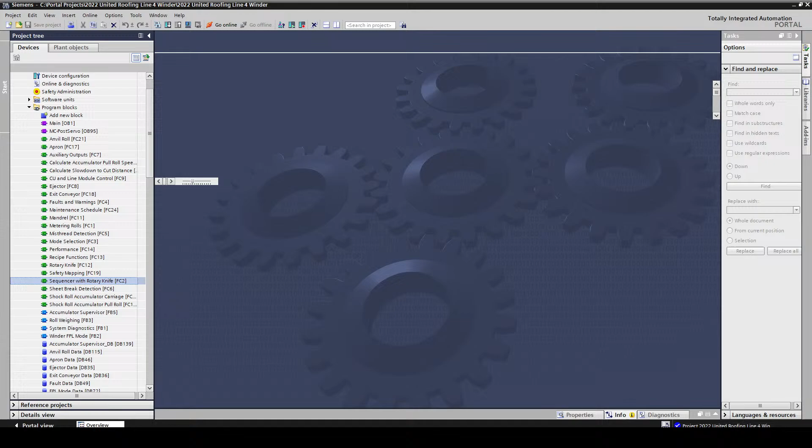So the first thing that you need to do is to have something that determines what block is getting executed, what set points are getting loaded, what functions are being engaged at any given point. And for this program, we chose to use a sequencer because for the most part, there's really two ways that you could do this. You could use a sequencer or you could use a state machine. And for this, the sequencer works a little bit better overall.

You are generally going to have to go through every step every time. And so the thing about it is if you get out of a step, something happens in the middle of an automatic wind, then you're not really gonna be able to recover, or at least there's only a couple of places where you'd be able to recover. And now I will brag on Brandon a little bit on this. Those recovery modes are the ones that he worked on especially to implement, to be able to detect these problems and to be able to recover and automatically start back up.

One of the things about this winder compared to an older style electric winder is that there's a person stacking just sitting there most of the time. He's on his cell phone, waiting for the rolls to hit him in the back as they're stacking up, and then for him to put them onto the pallet. One person, whereas the other one has three or four guys crawling all over the machine, adjusting everything, and for the most part, the few problems that are on the new winder, the alpha winder, it generally is able to recover from, take care of itself, and then just get back to running.

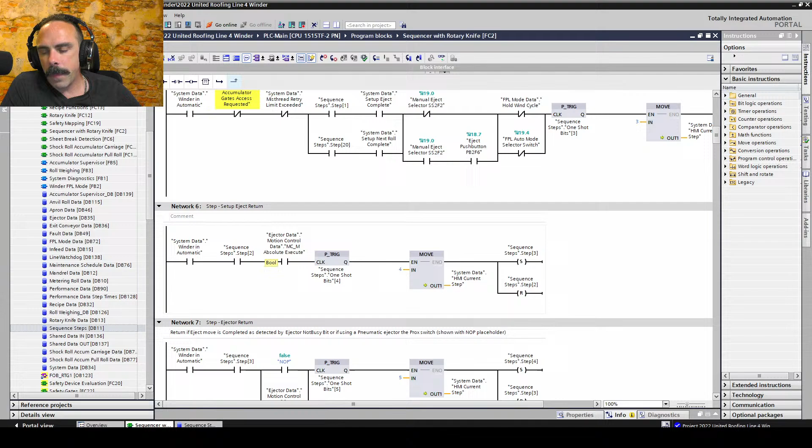But part of the sequence is, and the way that the sequencer works for this project is you have a series of steps, and you have a data block that has your sequence steps here. So this step is just an array of booleans, and as the sequence steps through, it goes through the steps, pretty simple. And in the logic, you have the conditions that are needed to advance to the next step.

This is a little bit different than a state machine, like I kind of mentioned. This wants to go from step one to step two to step three to step four, whereas a state machine can have transfers to any valid state. And we have some automatic controls, like our pellet mill control, that use a state machine. In its automatic control, it's sitting in a constant state for the most part. And then if something changes, it will transition into some other control state. And that's the difference between a state machine and a sequencer.

Now, with this sequencer, the only way that you can understand anything about how to step through these steps is to know the process. And that's where my dad's 30 years of experience of working with these types of systems has really come through, and set us up for success in starting from this.

Now, using the technology objects, this brought up a couple of issues, because, like we mentioned before, we always want to be efficient, and I think Elon Musk has said on multiple occasions that it's always a good thing to try and delete a feature, delete something. If you can delete it, then get rid of it because it's extra. It's just going to cause you trouble further down the line, and that's kind of a SpaceX principle.

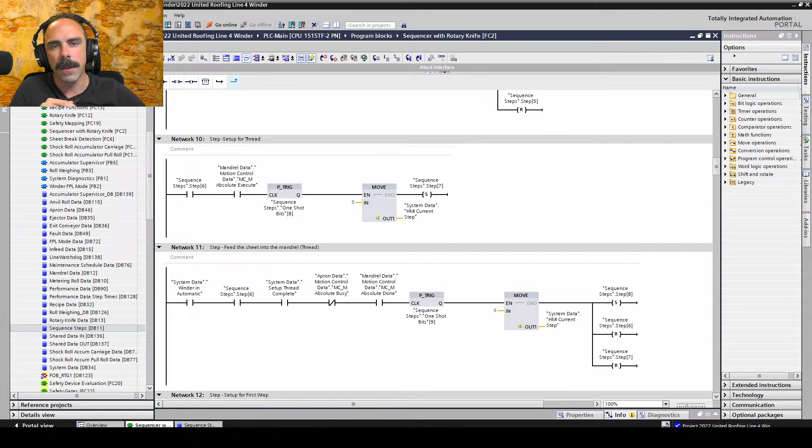And so you always get these code bases that work, but then you go back and look at it and you're like, oh my goodness, okay, so how can we pare this back a little bit? This is getting a little hard to work with. And so I feel like as we go through this, that's probably the next step: to be able to take in that methodology, and the improvement on this will be in simplifying the code and

kind of streamlining it. Were you able to get one of those, Brandon? Yeah, I downloaded a few. I guess I can try to stream on Discord or something. Yeah, if you stream on Discord, I can pull you up over on this other screen. Let's see if I can get them all up, because I know I can stream media player, but I don't know if I can have them all up in a queue. Obviously, this is our first time figuring out the best way to do all this. So while he's doing that,

I'll kind of just talk about the different axes. So there are quite a few different axes of technology objects in this. I'll show you in our technology objects. You can see the different motions here. So you have... All right. So we'll watch a couple of these while I'm going through. So hold on, let me get you up there. All right, go ahead and play that.

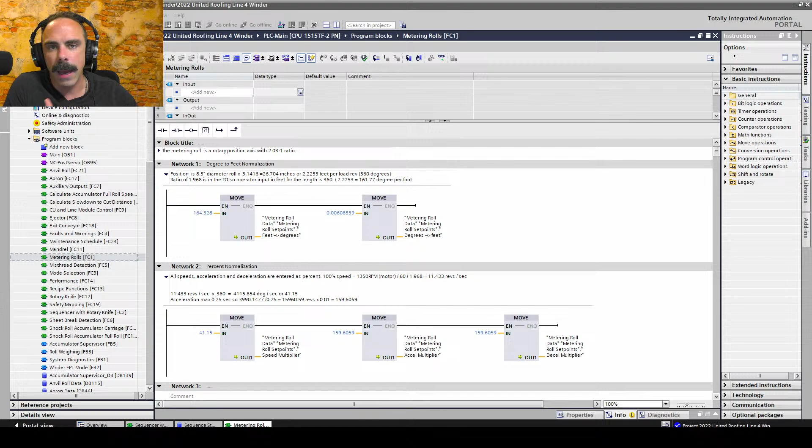data that's here. And so these normalizations are just ways to interface with your HMIs. So the customer likes to be in percent. You have to make sure that whatever they're inputting is actually in percent. And so that's what these normalizations are. Now on the metering roll, there's a couple of different things that we go through, and some of this stuff that you'll see here, if I don't mention it, like this calculate slow down to cut distance, we're using for other metrics that aren't necessarily involved in the actual control.

With these, there's safety loops, and then we start coming into our MC power and MC reset. And so those are the first two that you always got to get up. And that's why they're together. Super simple. When you're actually ready to operate your axis, you want to put the MC power on.

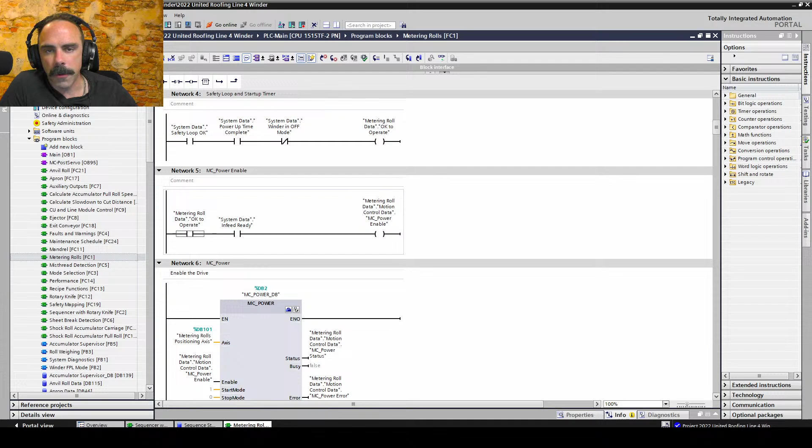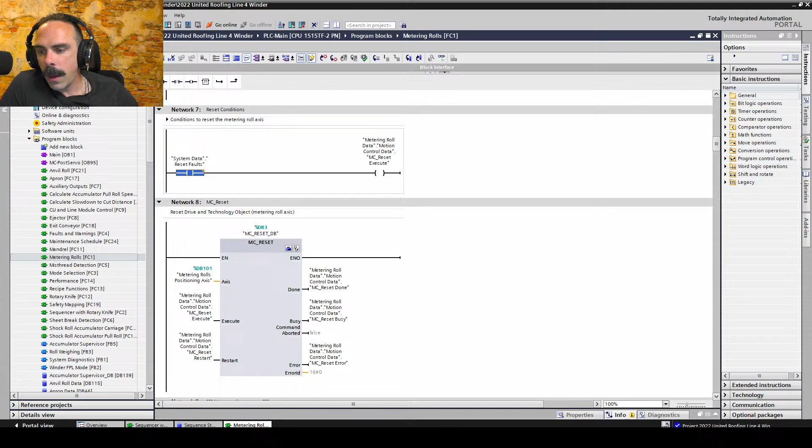And so here we have this safety loop, and that's we have this okay to operate, and then an in-feed ready. Because we're using S120s, it's a common DC bus, and so you have to make sure that that DC link voltage is up, and that's what we're doing there. MC power, it just comes on when that power is enabled. This block is enabled. That enables axis. We have a system reset, and that resets the faults just over everything, and that executes this reset.

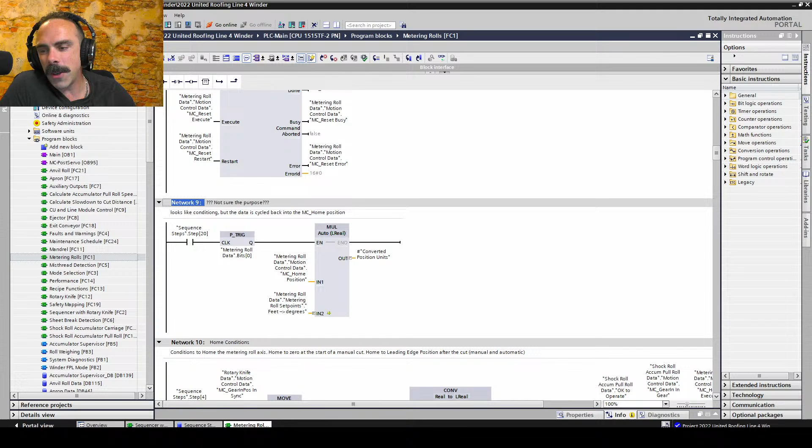Pretty simple. Now you'll see like we've done, we always try to eliminate code, and we're gonna be real here. Some of the stuff is like, okay, was that something that was useful in some other part of the code? And this network 9 here, as you can see, it's named not sure the purpose, because when I was going through it, it didn't make sense what was actually going on here. But we left it in there just to make sure that we didn't shoot ourselves in the foot in startup. Probably should go through and delete that, but I'm not going to do it now because the machine's running.

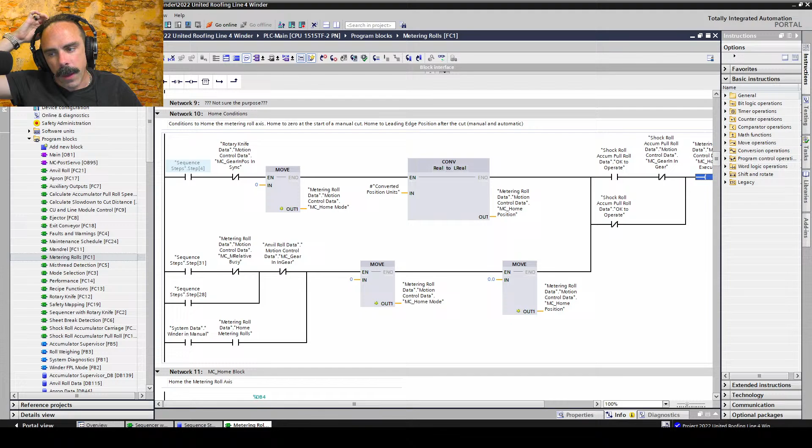We have MC home, and so you can see here how just to get one home execute on a metering roll, there's quite a bit of complexity in here. And part of this, if you hover over this, because we've named these steps the way they are, you can actually see that's the ejector return step. You hover over this one, that is the home knife after manual cut step. And so you go through all of these different conditions in order to fire your technology, like your MC home.

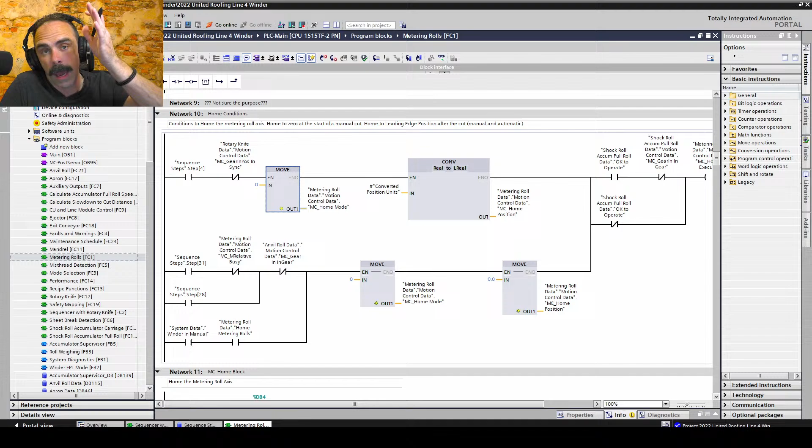And for this one, we're always using the home mode as being 0, which is just saying, hey, wherever you are, put in a 0. And that's what this is, and that's our home block.

And I will say, one difference between my dad and I, the way that we had operated before, and the way that we are kind of having to learn on the fly as Alpha is growing, is to operate in engineering teams and to be able to leave your code in a way that someone can come behind you and say, hey, is this right? I need to be able to look at this. And so documenting the code, naming things.

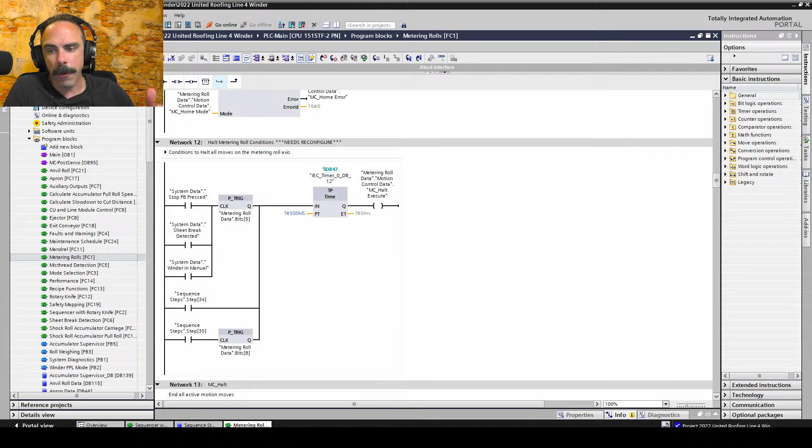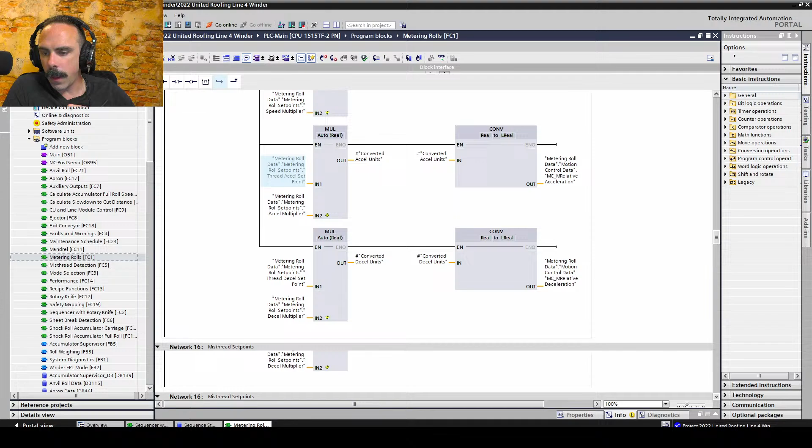One thing that you may have noticed, these two little buttons, the collapse all networks and then expand all networks. Those two buttons are the biggest thing because there's quite a few networks here. But you go through and see like MC halt has all of these different steps, and so you're just going through and determining all of your MC blocks. Let's go down to, say, a move that we want to actually coordinate.

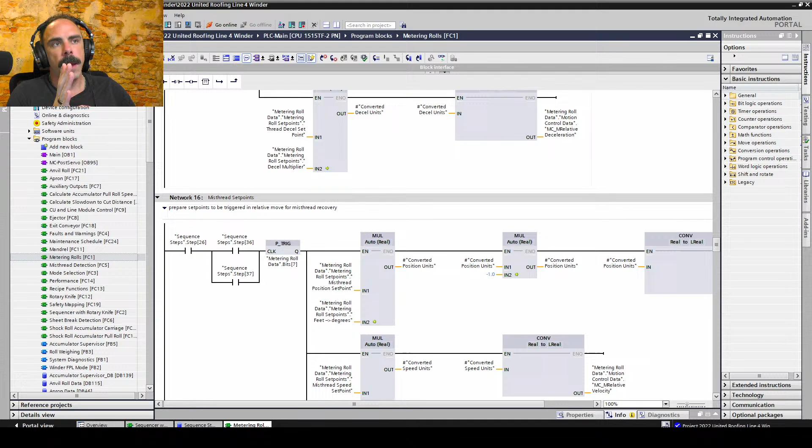So the way that wind works is at the beginning of the wind, the metering roll is lined up and homed, and then you put in your set point for the length of your roll. So if you were running a 64-foot roll, then there will be a conversion from the actual 64 feet, the actual display units, to your engineering units. In this case, it's all degrees. And there's a little bit of an annoyance with that, but because of the knife, we wanted to make sure that everything was lining up and we didn't introduce problems. So because the knife has to be in degrees, the metering roll is in degrees as well. And so one of those conversions is from feet to degrees.

And so our set point, we set a total length of the length set point. And in this case, it might be 66, 67 feet, whatever it is. And during that one long move, which is a relative move in this case, it does one long relative move. Other things will be looking at that position as it's going along and saying, okay, I now need to be running this metering roll at a higher speed. I need to be able to release it up to 100% speed. We want to slow it down to this speed. We want to slow down, but that's all one solid move.

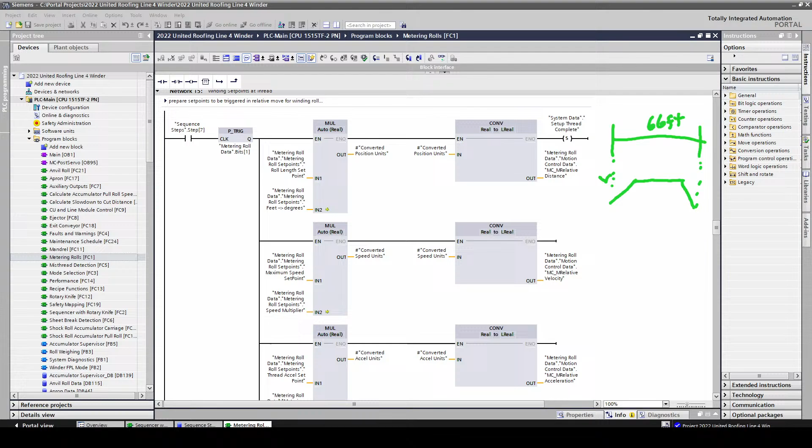And so our velocity would go up, be completely stable while we're doing that, and then come down. So that's what we're trying to do. And our move here gets executed here. So set the MC move execute. And in this case, step 8 is going to be thread. So once the thread setup is done and we have this information over here loaded in, then it's going to start executing this.

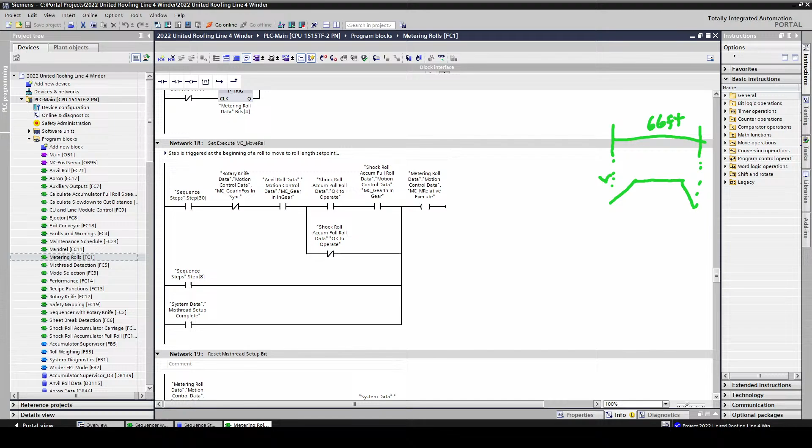But, big but, we use what's called the velocity override. And what a velocity override does is, let's see if I can change the color on this, it puts a cap on the velocity. So if this is 100% velocity set point, and we are wanting to cap it off at 50%, it would do this. Now, it would still keep up with the distance, and so we would put in like a 50% velocity override, and instead of going all the way up to the speed, it would go only up here.

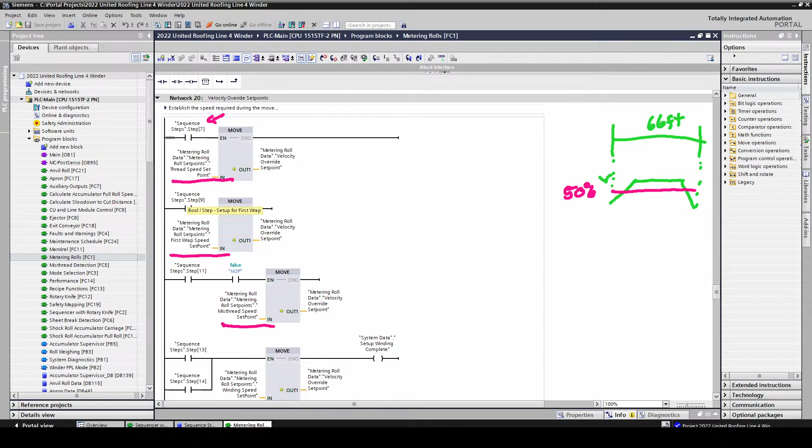Well, what we do is in our different steps, we are setting our different velocity overrides, and those are the different steps. So as we go through here, you could see our initial step is the thread step. There's a thread speed set point. The next change in the velocity override is the setup for a first wrap. You want to thread in slowly, then bump it up a little bit for a first wrap. There's a reason for this. And then you want to actually go to the winding speed. And so you have these three different speeds.

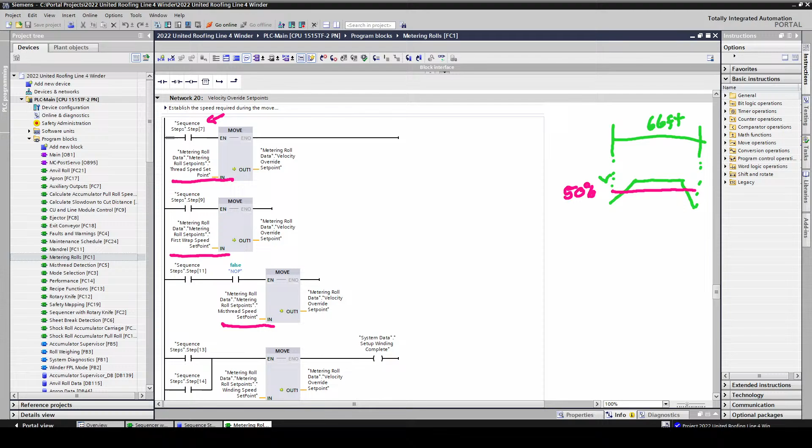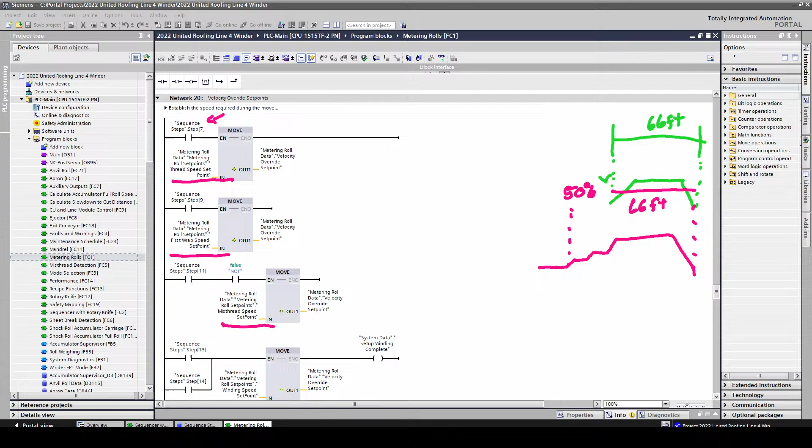And so winding speed is actually 100% of what you're wanting to do. So your maximum velocity that you're going to allow is here. Your velocity override for this is changing the speeds. And so you set up that set point to be here. And so what it would actually look like is be sitting at 0 speed, go up, sit, speed up a little bit, and then go up, wind, and then come down. And then that would be the overall 66 feet here. Because remember, we're doing a move that's based on 66 feet. So that's kind of how this system works.

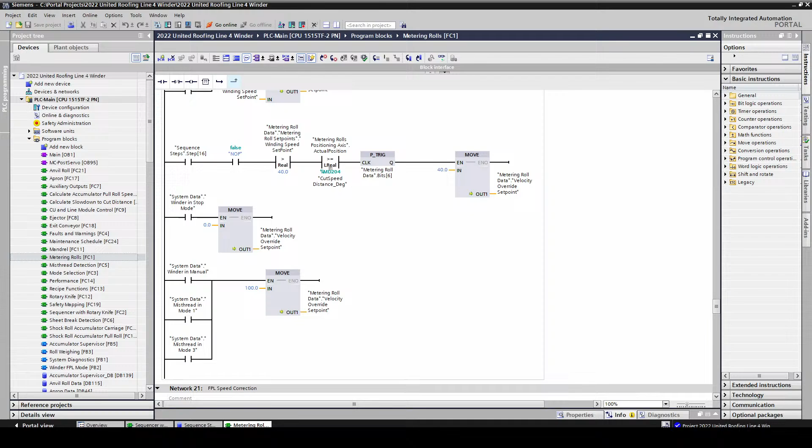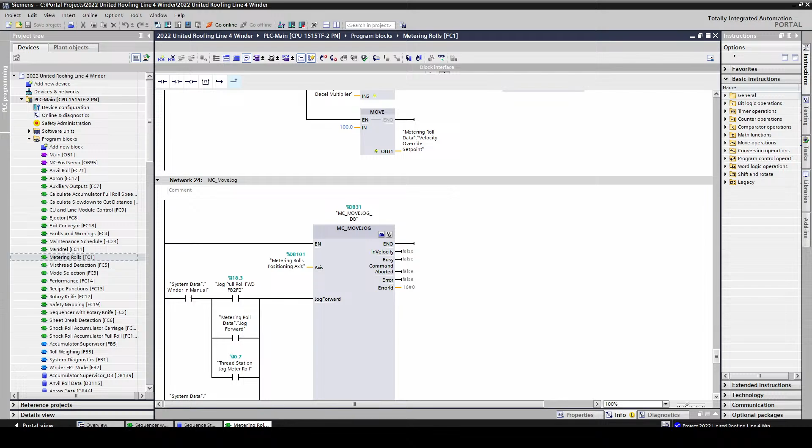We can clear that, and yeah, so that's what we're doing here. I'll just scroll down through here, and you can see all the different places where we are going through and changing our velocity override. And there's a lot of different stuff that goes into these, but this is kind of the simplest version. The simplest axis is the metering roll. It kind of goes up, runs a speed, runs a distance. And so yeah, we have other modes. And move jog, same thing. You have all the different conditions that you have for that.

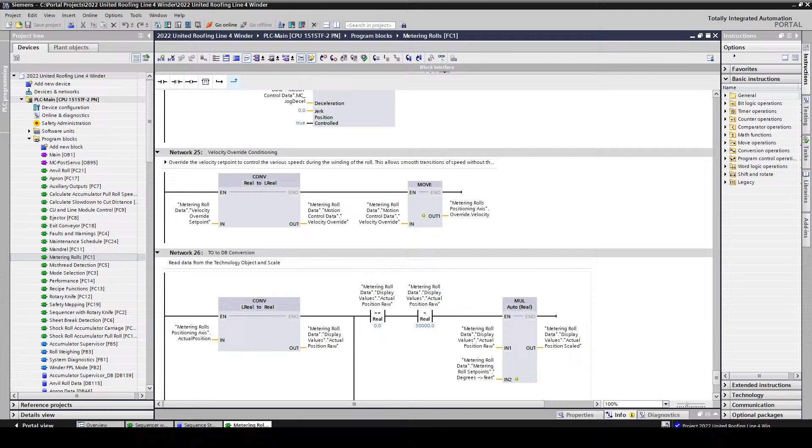Now, if you notice, there's quite a few different things that you have to go through, and you can kind of look at what's there on that one. Let's take a look at the mandrel. Brandon, has anything jumped out when you were going through this for the first time that you might want to tell about, pitfalls or whatever with these motion control blocks?

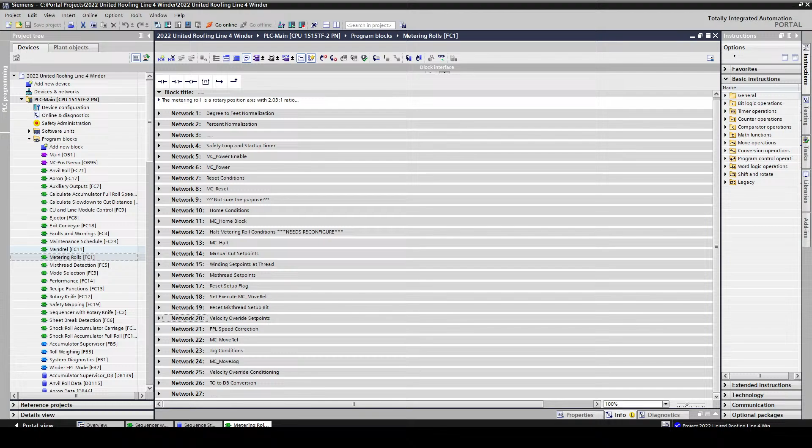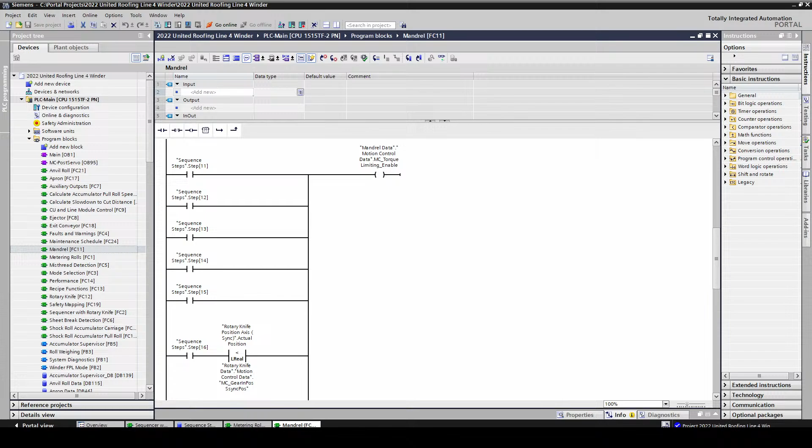I mean, not necessarily. I think we had some issues with some of the sequencing things. Obviously everything's got to be in time and in sequence for it to work right. And we had some issues with some of the processor stuff, but with the actual block itself, I don't think I ran into anything really that I can think of. Not right this minute. There may have been something, but if I think of it, I'll bring it up for sure. Yeah, yeah. That's good.

So, yeah, one of the cool things, and I think we've had a comment before talking about a winder unwinder, and in a way this is an unwinder app or a rewinder application, because we're taking product that's coming from a big roll, doing some stuff to it, and then winding it up into a smaller roll. One of the ways that you get a nice tight roll is by running the mandrel, the big metal bar, in torque control, or in our case, torque limiting.

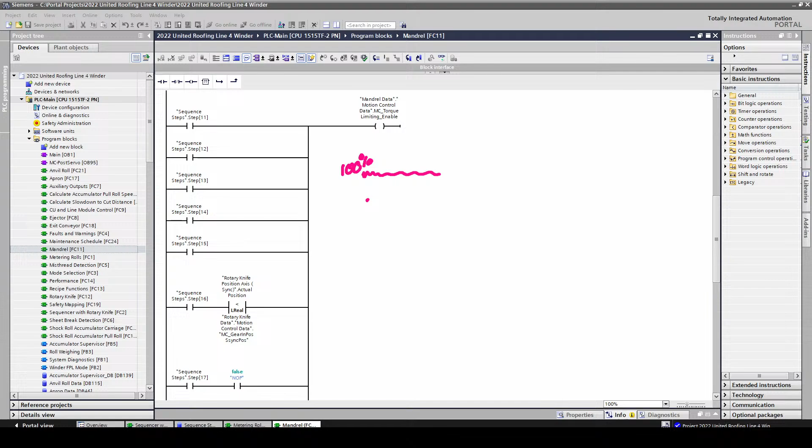Now, the difference between those, I'll try to explain it quickly. Torque limiting: the motor is trying to run at a certain speed, and it is being torque limited, and because it's clamped off, it may want to run at a speed of like 100%. But something is holding it back, and it's only running at say 50%. So it's constantly wanting to try and get up to this 100% speed, but it's not able to

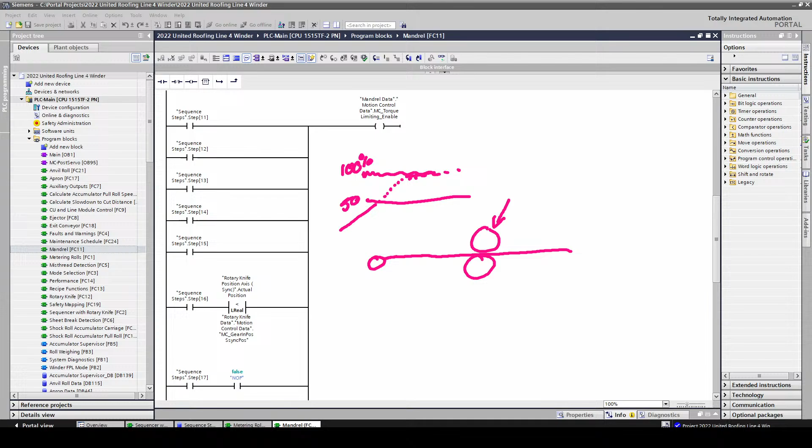because it's being clamped. In this case, the metering rolls are sitting there feeding the material in, and say this is running at 100 RPM, and the mandrel is trying to run at 1,000 RPM. Well, the torque limit is set so that it gets tight tension as this starts to wind up, but it's not so much torque that it breaks the sheet. So in torque limit, this diameter is going to be growing the whole time.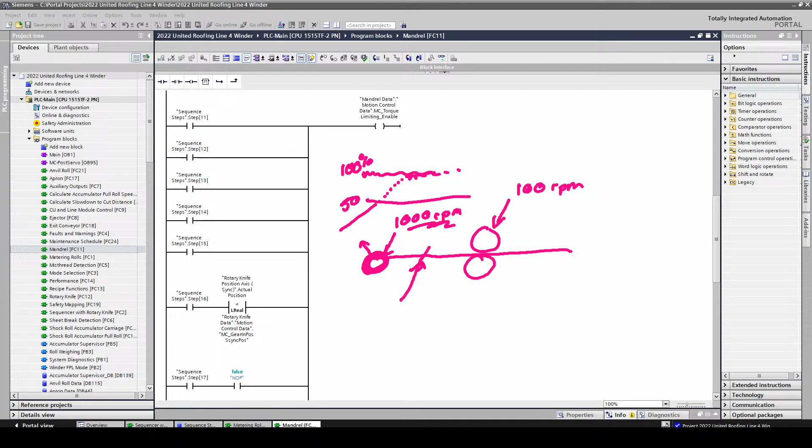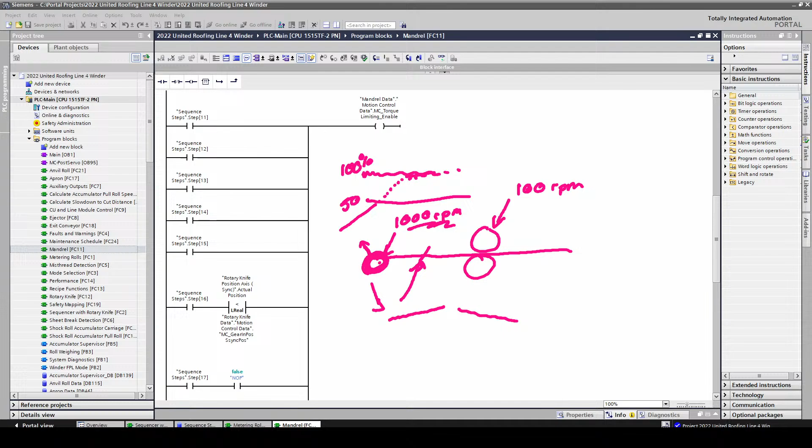And so you can either keep up with the diameter and change this RPM, or you can just run in a torque limit and give it enough of a speed. So you'll actually see the RPM on the mandrel, if you traced it, drift a little bit in the wind, because as it's getting bigger, well, actually it's going to go down, right? Because the torque is going to be the same. So as it gets bigger, it's actually going to go down. So that's what we're doing here with the torque limit.

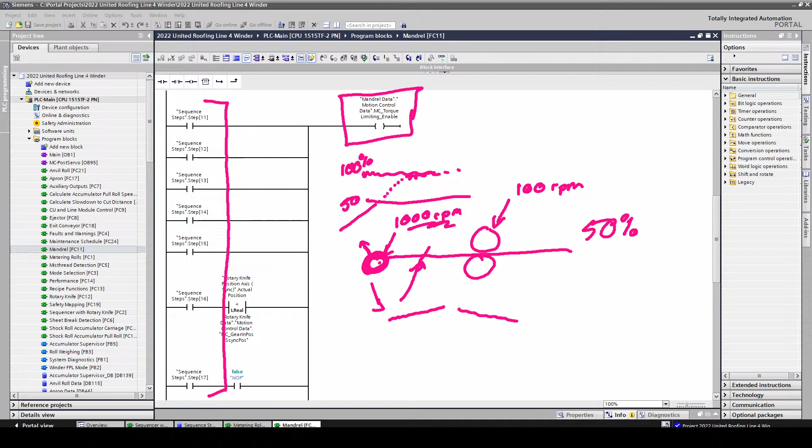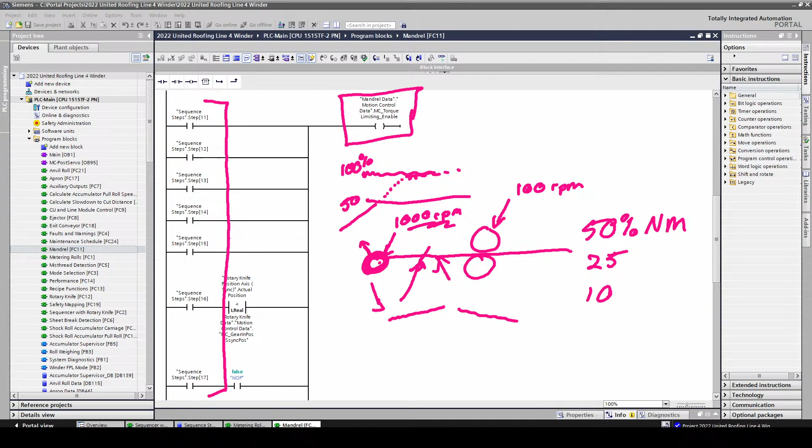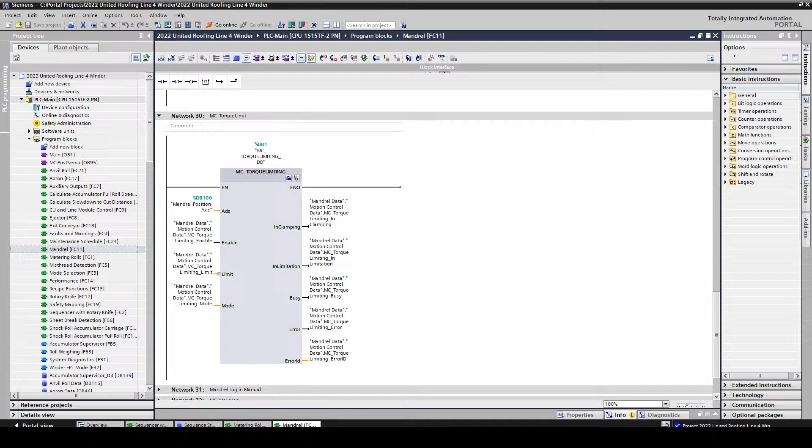You look at all of these steps that we have here, that's when MC torque is going to be enabled. And obviously you're limiting by like 50% of your torque, or 25% or 10, whatever it is to keep you from breaking that paper. That's what this is. One thing about this torque limiting block is very important, and I want to talk about this. It's kind of a motion control thing, not just for this block, and it has to do with a thing called following error.

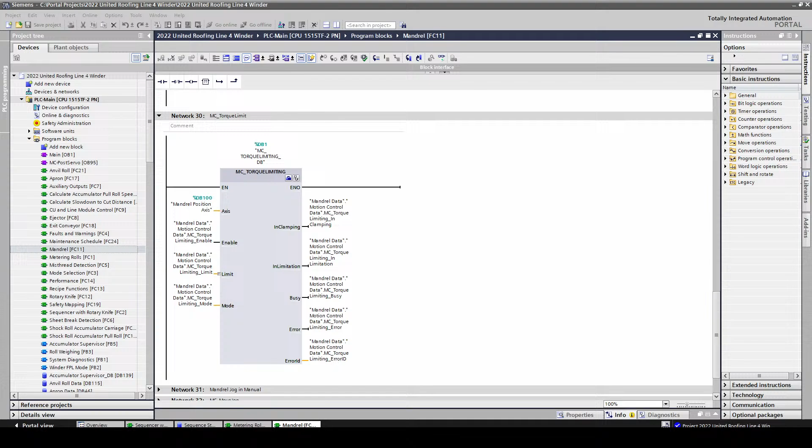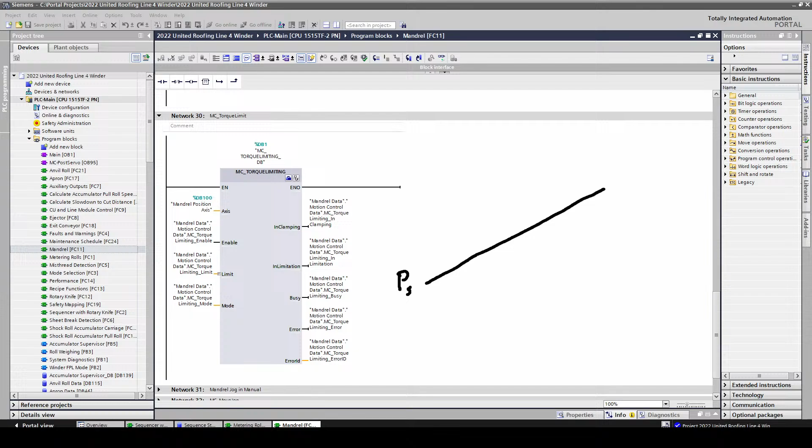If you are not familiar with what following error is, in a position controlled system, if you are running at some RPM, your position set point will look something like this. Nice and solid speed, rise over run, that's going to be your velocity. So say this goes up from 0 to 1,000 millimeters, whatever. Doesn't really matter the units. But as it goes up, that is your position.

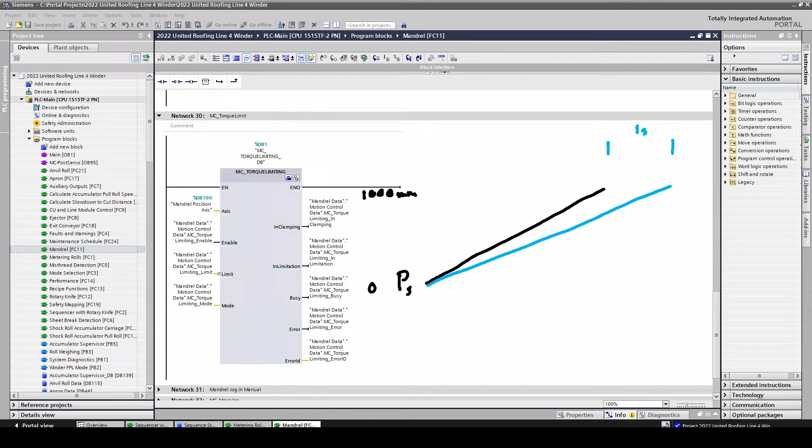Now, that is if you can keep up with the actual set point. What can happen though is, if you cannot actually accelerate as fast as the set point is going, it will look like this. It might still get to that same 1,000 millimeters, but it takes a longer time. Say this is 1 second longer to get there. This gap here, that is constantly building up and getting bigger and bigger, this gap is a following error.

And normally, that doesn't really matter that much, because ultimately, if you're allowed to continue to go, the following error gets smaller and smaller, and once it actually reaches the position, it equals 0. It took a little longer to go, but it's supposed to be at 0 here, so it's at 0, so the following error is 0. No big deal.

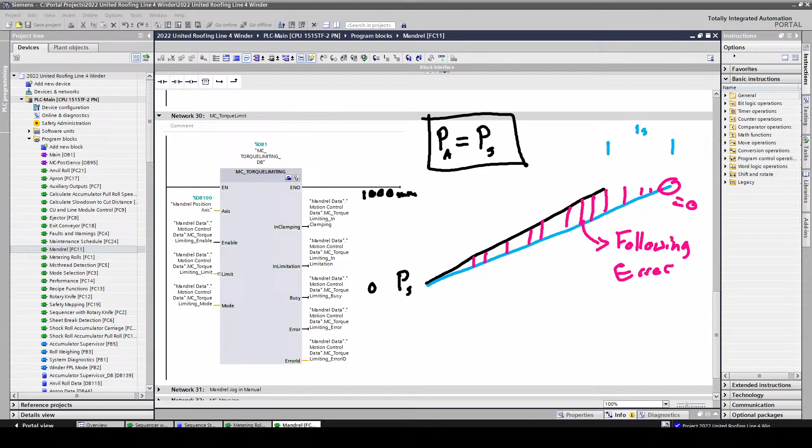Well, part of a problem with a position controller is that the position controller is always trying to say position actual equals position set point. So this is the whole point of a position controller. And a position controller is really serious about doing its job.

And so when we're looking at this, the reason I bring this up on this block: MC torque limiting can get you into a lot of trouble if you are doing a position controller. And here's why. Because if your position controller is enabled, it's trying to constantly make that. Well, the whole point of MC torque limiting is to make this happen. It wants to hold it back.

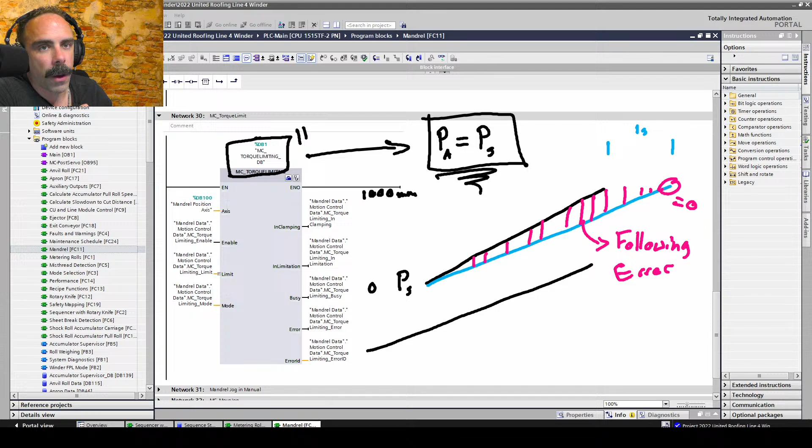And if you are in torque limiting, this value will continue to build up, build up, build up. And so no matter how long you run, it's always going to be building up a following error. That following error is just going to keep getting bigger and bigger because it's how it is. Well, that doesn't sound like much of an issue because you're like, well, we're not using a position controlled move.

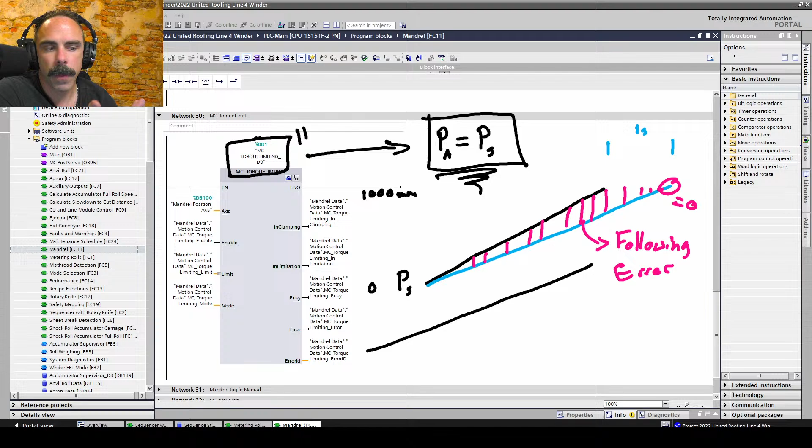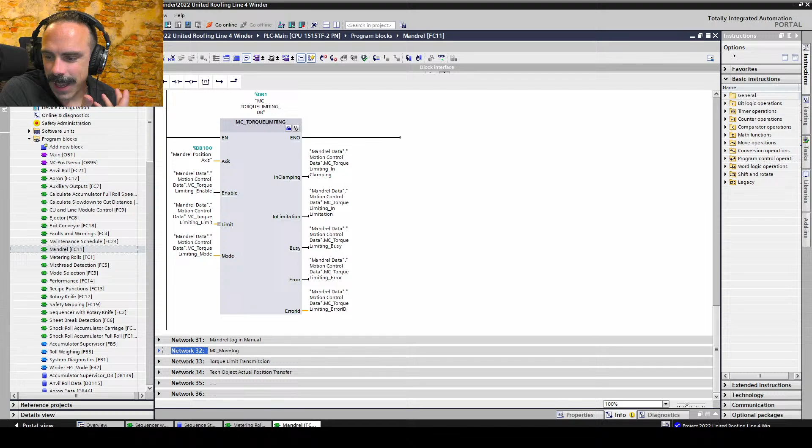I'm going to show you why this can get you in trouble. This mandrel move on here that it's in. So we're using the jog just for reasons. And honestly, when we first wrote this, we didn't understand these blocks enough and kind of got in a little bit of trouble. And this was back in the 2020 winder. This is the biggest thing that, like, we were checking, but it caught us off guard.

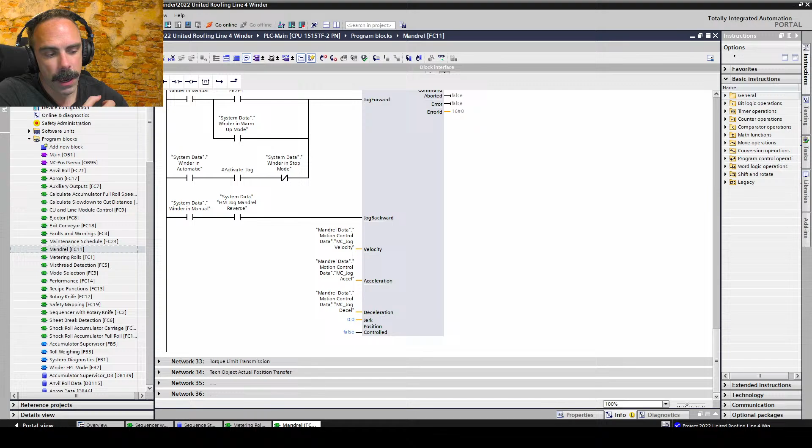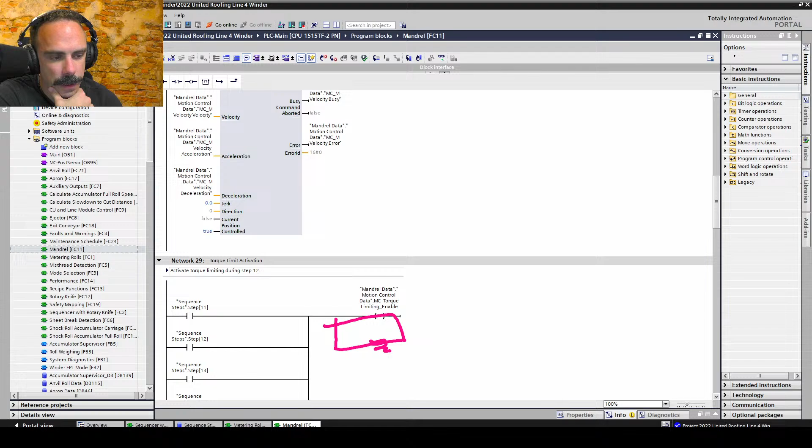So if you notice here, on the jog block, there is a position controlled parameter. And it's a jog, it's a velocity jog. Heads up, look at this, the velocity move, which we're not actually using. Velocity has the same thing, position controlled. And if you notice on this block, the position control is set to true. Big problem. Big problem. So let's go look at this jog block.

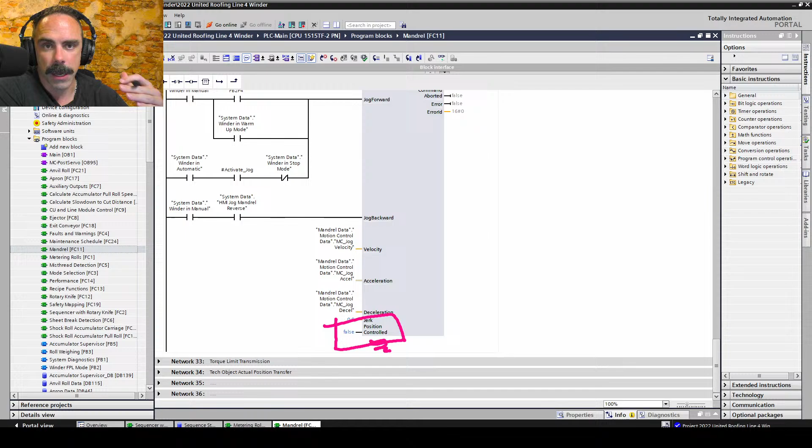If that position control is set to true, like up in the velocity, when you are in torque limiting, it will always be trying to catch up that following error, and it just can't because it's torque limited. Well, the second that you turn off the torque limiting, it tries to, as fast as physically possible, catch up and make the value of your P actual equal P set point. Even though you've been running in a position control move, it's going to try to run that up.

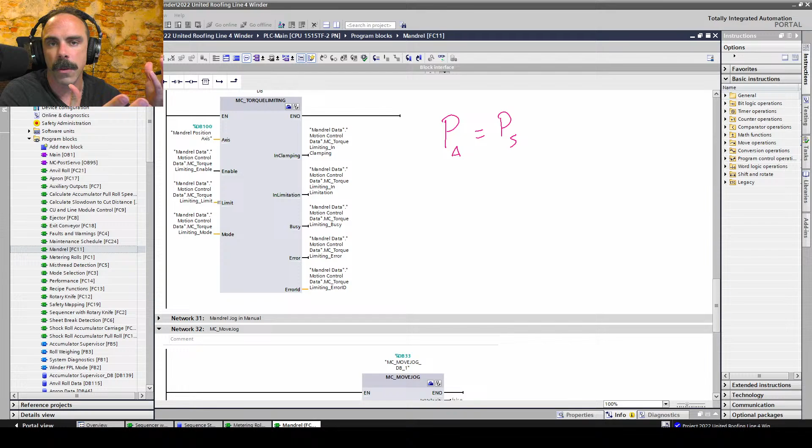The first time that we did this, the mandrel, when we deactivated this torque limiting, it spun too fast and it actually wobbled and had a mechanical resonance in it. And we were literally sitting there with our hand over the e-stop because it was the first time we were testing this, and just instant hit, it still spun too fast and bent the mandrel. And so we had to go back and mechanically rework that.

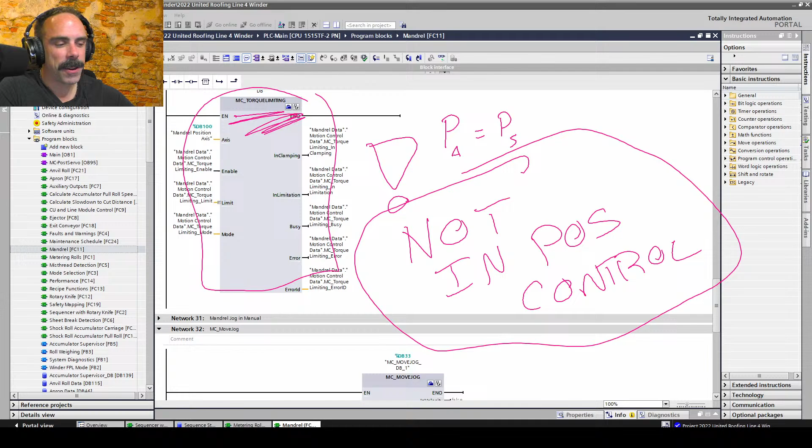So if you are going to use MC torque limiting, and I'm going to put this in the video about MC torque limiting, if you're going to use this block, be super careful so that it is not in position control. I'm just glad you made that mistake and I didn't have to be the one to call you when I was commissioning and be like, hey. So yeah, that was one that I'm bringing up in big letters and circling because it was a big one. It didn't end up costing a ton of money, but it could have cost lives. Those sorts of mistakes. I mean, it sounds dramatic, but I know we've talked about this before.

So Lucid kind of chimed in on this. You don't need to disable the position control in the technology object. You just need to make sure that you're not doing a position controlled move. So great point there. The blocks that I brought up, MC velocity and MC jog, you would think would automatically be velocity controlled moves, but they have the option to control the position control.

Now, here's the thing: there's some moves that you can absolutely use the MC torque limiting in, and it be in a position control move, like an MC absolute or MC relative. Those have to be in position control. They have to be on. You could still use the torque limiting. You just can't turn the torque limiting off while you're in the middle of that move, because otherwise it's going to catch up that following error, and that'll happen.

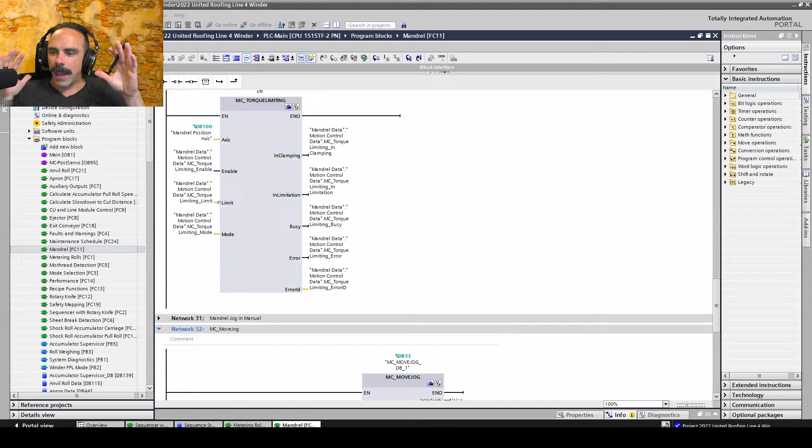It sounds like a joke, but I'm a little bit ashamed to say this: sometimes I'll go through and I'm like, okay, I'm making this change, it's not changing anything that can cause a problem. But then when it works, I'm like, oh hey, it actually worked. I'm surprised. I've been doing this long enough that I shouldn't have that reaction. I don't know about you guys.

If you still have that sort of experience... For me, if I've started up one Siemens drive, I've started up 1,000, and there's still this pleasant, oh hey, I downloaded it and it came up with green lights, that actually worked. Yeah, I had a lot of those moments working on those automatic recovery routines, trying to get it where it'll go back into the sequence. That was a pain. And then I'm like, oh wow, it actually worked.

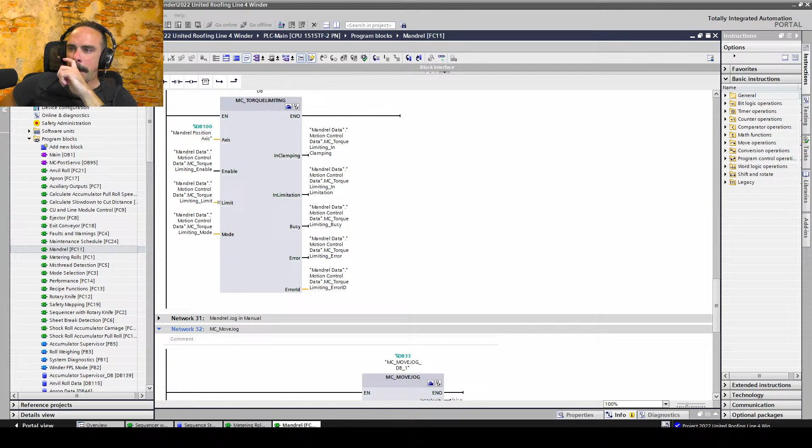What do you feel was the hardest part of that programming? I know you were jumping into the middle of it. I mean, just really figuring out how to get everything back in the sequencer without causing other issues. Because there's a lot of stuff, I know you showed some of it, that has to happen, like the homing of certain axes, to move on to the next step.

And there's so many conditions where, okay, if the home is not complete for a certain axis, then it won't move to the next step. So figuring out the best spot to put it without causing errors. Trust me, it took me several attempts to figure out the right spot to jump back in without causing some kind of technology object fault, like trying to home an axis that was already in motion, that would fault out the drive.

But anyways, what percentage of confidence do you have in what's implemented there? That puts you on the spot. What do you mean, the code there? Yeah, so for me, even in the code that we have on the 2020 winder, it'll be almost 4 years running here in May, and there's still a part of me that thinks it might just fall apart at any moment.

It's probably only like 1%. So I'm like there, 98, 99%. There's been a couple of things I've gone and added to the program, and I'm like, okay, well, here's the off switch on the HMI. So if it does something crazy, just turn it off.